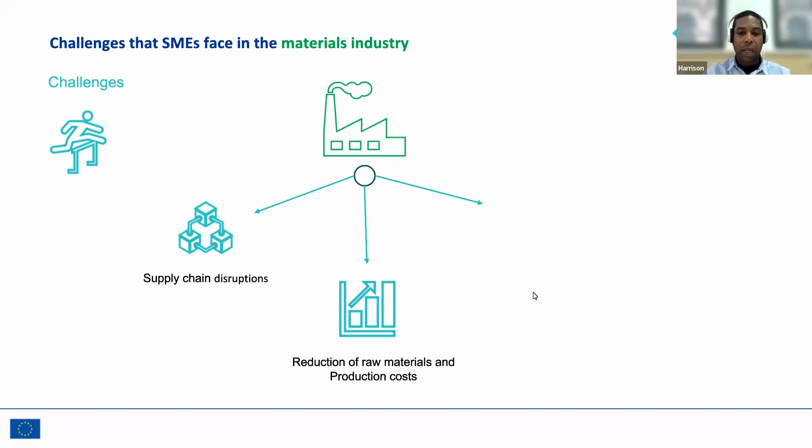Now, the second aspect: raw material and production cost. It is true that many companies, day by day, have production, have product. However, sometimes they are not doing it under optimal conditions; they are just having product, just producing. The process and the parameters could be set according to material requirements, but as soon as the material changes in some specification—the raw material, once it arrives at our company—maybe we need to change the process, and some correlation between the process parameters and the product properties is needed, which can be provided by the proper digital technology.

Also, the lack of technology adoption could be a challenge. Why? Because of the resistance of the operators to adopt the technologies, and because of the first issue I mentioned before, which is access to finance to be able to adopt those technologies.

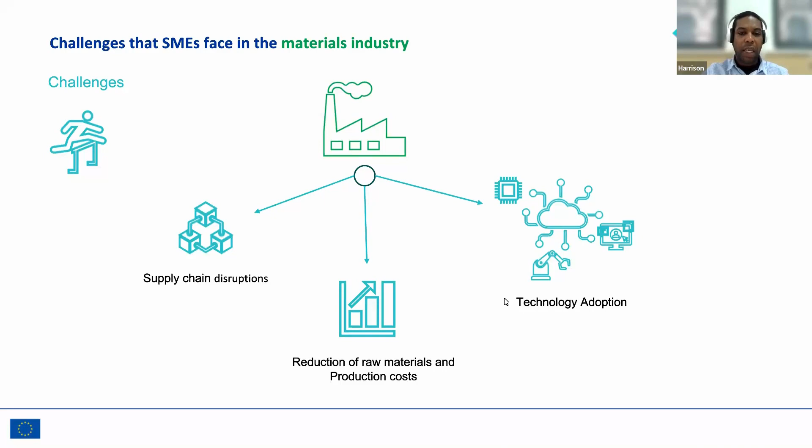We know that production costs are a direct factor in determining our revenue. So the challenges of optimizing the use of raw material and reducing production cost will have a direct impact over the three principal stages that result in a product: design, processing, and manufacturing operations. Why? Because those are the stages in the industry that determine a good product at the end.

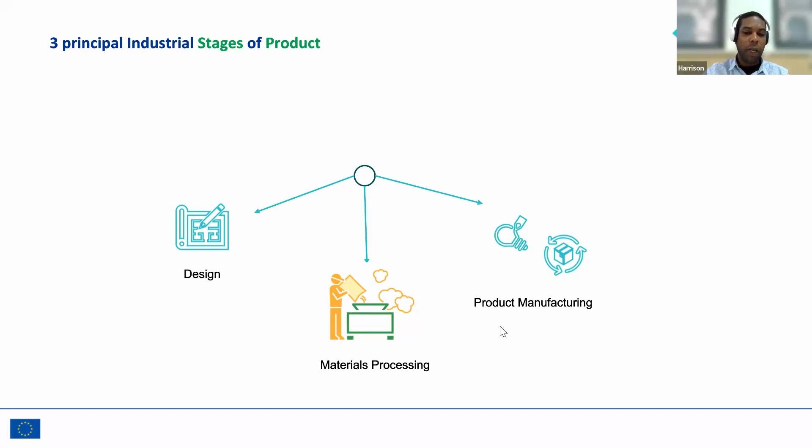Beginning with design, if we don't have the proper tools to adapt our product, if we don't have the specific conditions by which the material can be processed, we will probably be wasting material instead of going directly to the production operation. Those three stages could become a real headache for SMEs that haven't adopted the proper technology, especially when demand increases, because we need more product in even less time.

And it could also be a big nightmare when innovation shows up. Why? Because SMEs must think about new materials to be used, their specific properties and characteristics. They also need to determine a design to apply that fits the product, and the processing conditions in which the new material has to be processed.

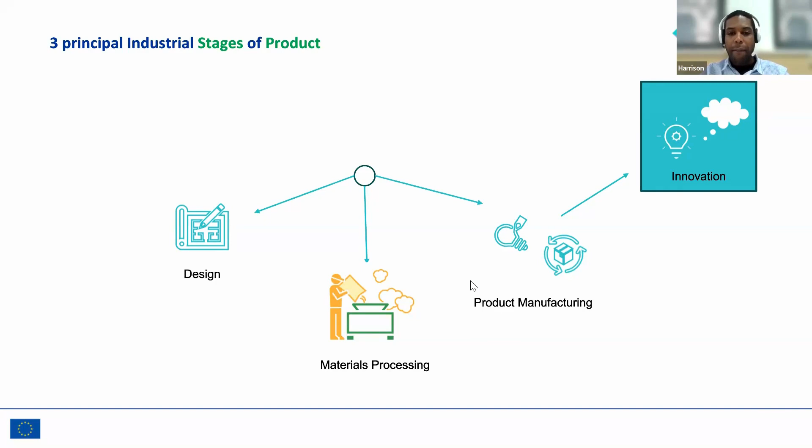Most of the time, those innovations imply changes in the production line, especially until getting the optimums. It won't always be the same to manufacture under a well-known procedure compared to a new one, meaning the innovation, because as I said before, innovation also implies trial and failure, and that means resource consuming.

However, making those trials and failures with the help of software could reduce not just the use of resources, but also give us a result right away, without waiting so much time - this could be so useful. Moreover, it reduces production cost, since the manufacturing operation can be based immediately on the optimal condition we obtain as a result with the help of those digital technologies.

Despite the challenges we have since acquiring this technology, it also allows us to establish correlations between process parameters and product properties. Also, by using new technologies, we can have better traceability of our material and of the process, and we can have access to data, continuing to improve by storing that data for further improvement in the company.

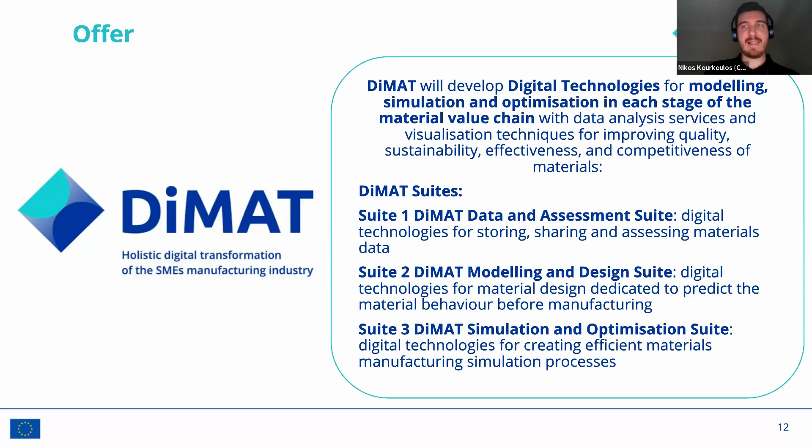For the development of this solution, we are collaborating with specialized partners. We have a very strong commitment from research and development partners such as Fraunhofer, UPV, NTUA, and CERTH. We have technology providers for developing the toolkits, and industrial partners like Imerys and Hegla to test the solution within the project. This is how we actually know that the toolkits released on the market are going to be functional and needed. The specialist partners are responsible for exploitation and standardization activities.

Through our development and deployment of our solutions, we have 3 main goals: technological, economic, and societal. Technologically, our goal is to provide open source solutions to support SMEs in optimizing their material production processes. Economically, we provide cost-efficient and affordable solutions, promoting the transition to industrial digitalization. Societally, our goal is to speed up the transition to a greener economy and support the sustainable goals of the SMEs.

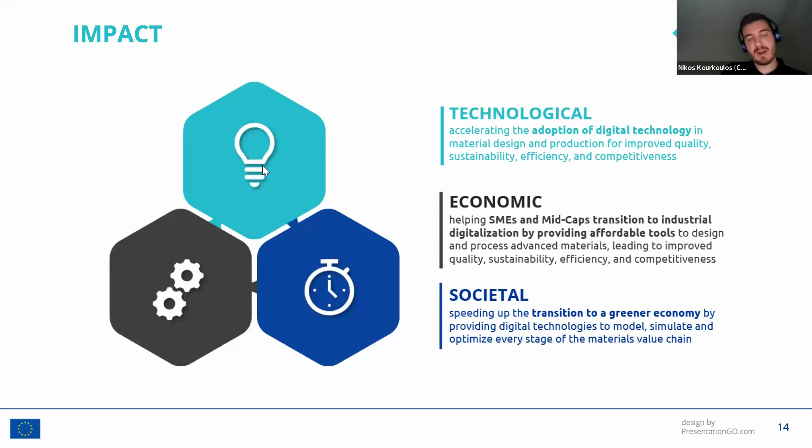So how are we doing this? At first, we started with the overall concept of DiMAT Suites and toolkits, and then we ran the industrial scenarios and collaborated with the pilots to understand where to implement the solution and what is important for them. Based on that, we developed the KPIs and the solutions to work in the best way possible. We developed the framework of the DiMAT Suites and toolkits, and now we're in the phase of developing the suites, and in a few months we will have our first release. Around June, our pilots will start testing the solution, and after this testing we will have a call for early adopters, and we are going to invite external SMEs to collaborate with the suites.

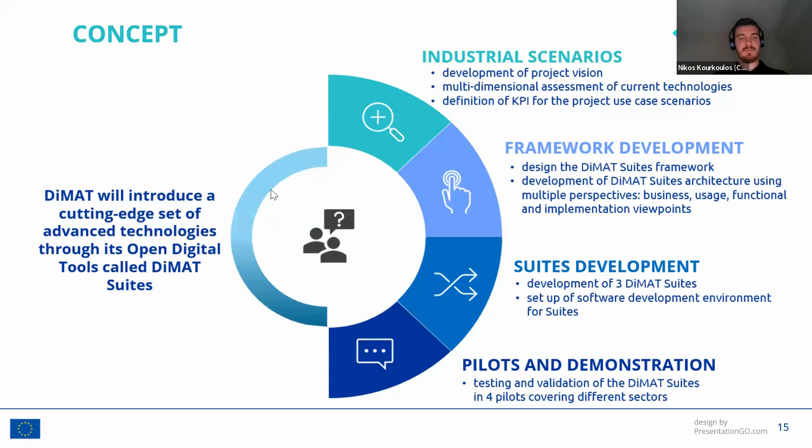As I mentioned, we are developing 3 suites. My colleagues who are developing them will give you more details after. Just to give you an overview, each suite includes 3 toolkits.

The first suite, the Data and Assessment Suite, consists of the Cloud Materials Database Toolkit, which is used for storing data in a harmonized way, the Knowledge Acquisition Framework that classifies materials in a graph, and the Materials Environmental and Cost Life Cycle Assessment Toolkit that gives a graphical estimation of the environmental and economic impact.

The second suite, the Modeling and Design Suite, includes the Material Design Framework Toolkit that provides information for the material design processes, the Materials Modeler that assists in designing materials and predicting their behavior, and the Material Designer Toolkit that assists the design of complex materials.

The third suite, the DiMAT Simulation Optimization Suite, includes the Materials Mechanical Properties Simulator that predicts the mechanical behavior, the Materials Processing Simulator that predicts the outcome of materials processes, and the Digital Twin for Process Control that develops digital twins for enhancing industrial business process control. To be mentioned is that all suites and toolkits are interconnected and can be provided as a holistic solution.

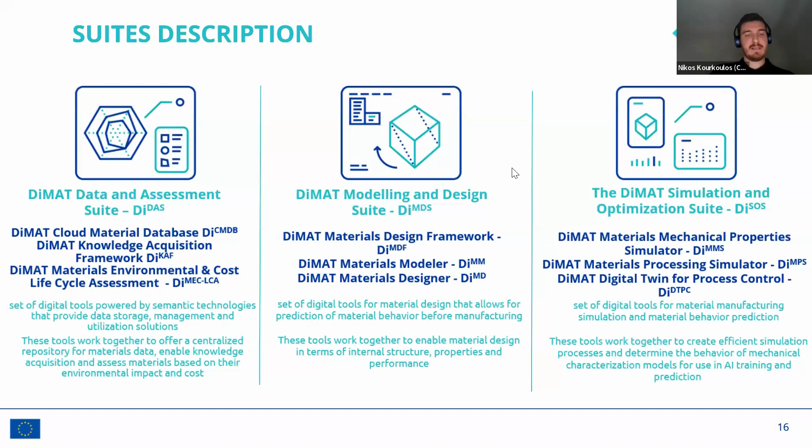Our toolkits are going to be tested in pilots within the consortium. We're having 4 different pilots. The first one is focused on polymer, so textile production. The second one is on advanced composite materials. The third one is on glass. And the fourth is on graphite.

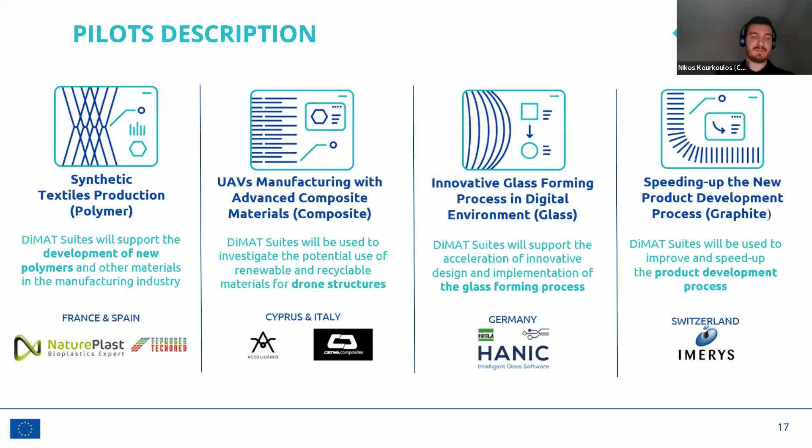Now, before we jump into presenting all the suites and the digital toolkits and how they're going to be functioning, supporting you in all the processes from designing the materials to modeling and processing to manufacturing, we are going to present to you the survey. Since we are a lot of people today, we cannot start a live discussion, but we really want to hear your feedback regarding those solutions because we're having our first release of them within a couple of months. And as I've mentioned, afterwards, towards the end of the year, we're going to have an expression of call for interest from early adopters. So in order for this to happen, we need to hear your feedback. And prior to this, we're going to provide you in a nutshell with information regarding the survey that we're going to launch today during the webinar.

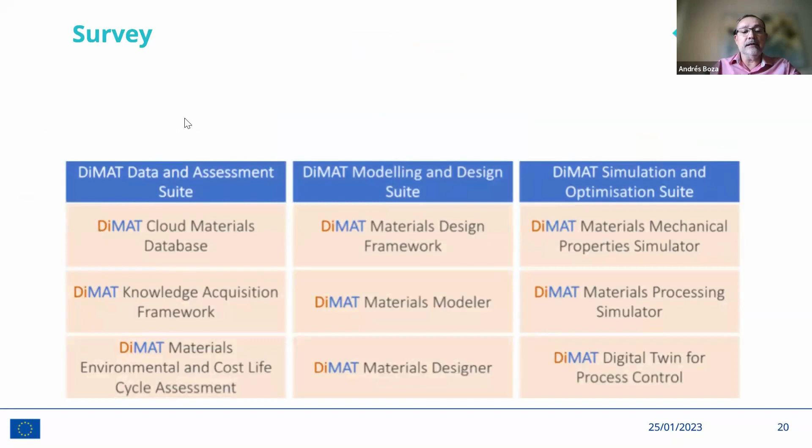And also with the technical perspective. The solution will be presented now, and as you know, we have 3 suites, and we want to know your perspective for each suite. Then we are going to launch three surveys, one after each suite. The idea is to collect information about your interest in each suite and also difficulties in order to make the implementation of the suite in your organization. This information gives us feedback in order to make good governance about the solutions.

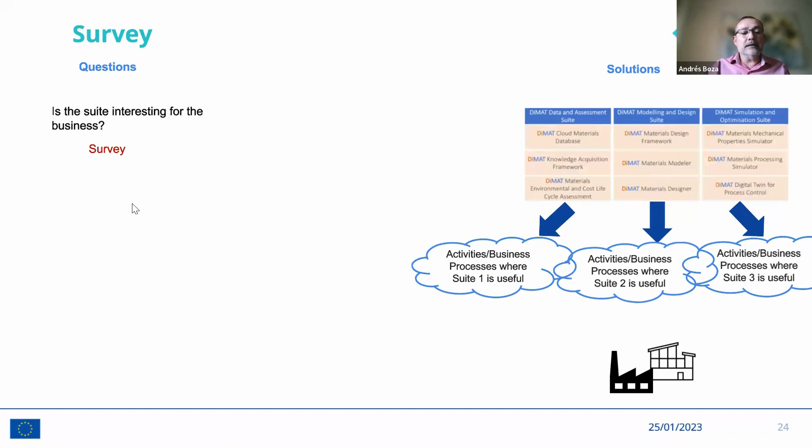The idea is that you identify how you can use the suite in your organization. You identify the business process and activities where the suite is useful. Then each suite is useful for different proposals. And we want to ask if the suite is applicable for your business.

If yes, how important are these different business processes? How much can the process be improved using the suites? A list of processes that will be highly impacted by the suite, and also a multiple choice list

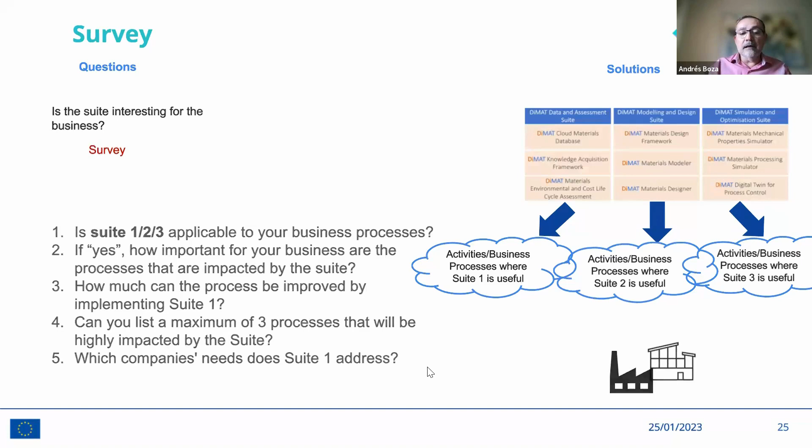about needs that the suite addresses. After that, we can also identify the difficulties to make the implementation in your organization. Then we want to know the organizational difficulties in order to make the implementation in your organization, and also the technical difficulties.

And as I have said before, this gives us good feedback for our solution. The survey is only 9 questions, and the survey is the same for all the suites. At the beginning, you have to introduce information about your company, but only the sector, the size, and the location. And this is all that you have to include in the survey that will be sent after the presentation of each suite. Thank you.

Thank you, Andres. Now, moving to the fun part, we're starting with the actual presentation of the solutions. First, we are going through the DiMAT platform, so how you can actually interact with the solutions. This is going to be presented by Miguel Angel Mateo Casar.

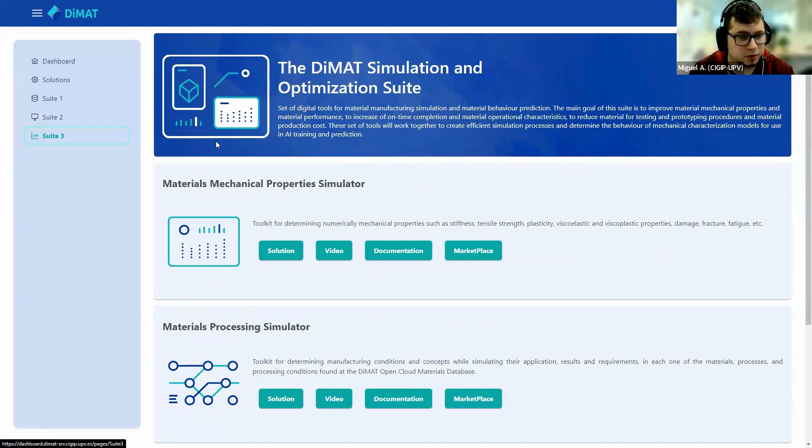This button goes directly to the place where we will sell the solutions or provide it to download the product if you needed it or if you want to include it in your company. As you can see, this platform is working on it now, and the idea is to improve it at the end of the next months with the first and second release of the solutions.

Also, only to remember that all these solutions work standalone, but we provided this platform with the possibility to access the different solutions. And if your company only has 1, 2, 3 solutions, you can only see here your solutions to facilitate the use inside your company.

That is the first view of the DiMAT platform, and thank you all for attending. If there are some questions or suggestions, I'm open to them. Please send me an email, or at the end of this conference, or here inside the chat, and I will try to answer you all. Thank you.

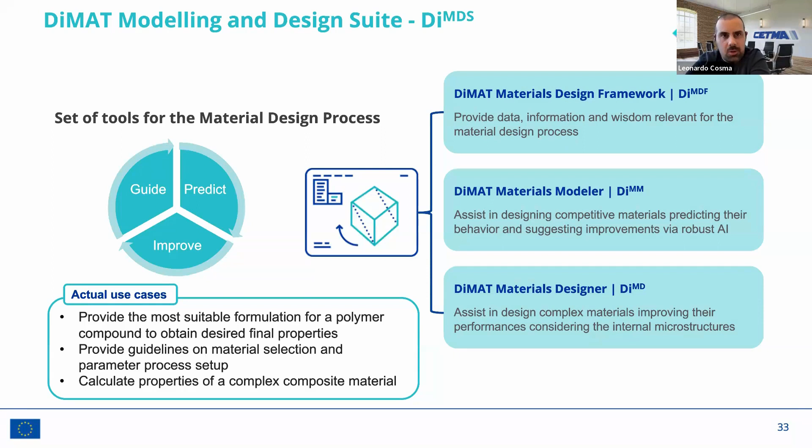That's all for this introduction to the suite. Thank you, Leonardo.

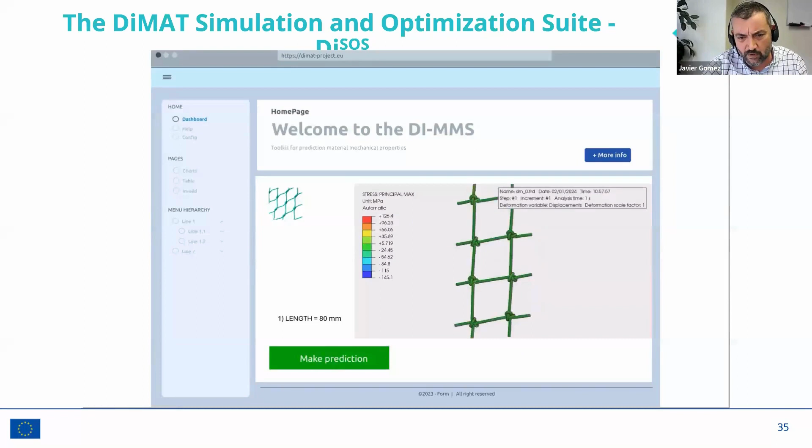The first sample is the optimization of a fishing net, in which with the toolkit we can modify the geometry of the fishing net and predict the strength. We can operate and analyze, like in a finite element program, our results. We can also optimize the dimension of the network considering the strength.

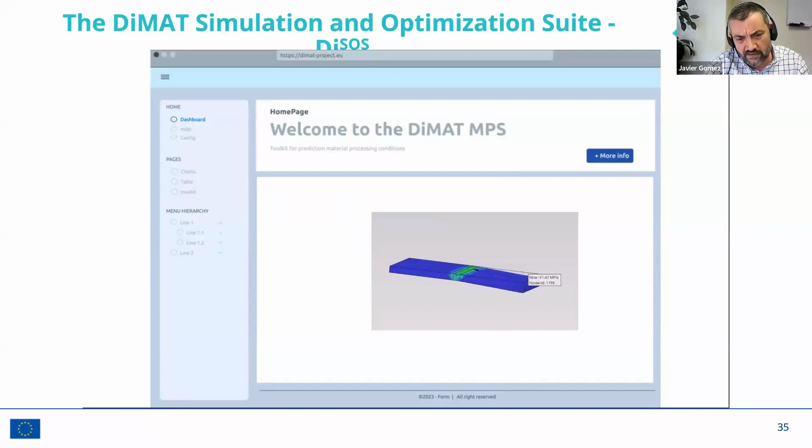In the second example, we are seeing a glass industry process in which we want to optimize our bending operation using a laser. We have some laser parameters like temperature and dimension, and with our toolkit we can predict the result of this operation. We can predict how the glass bends by modifying the laser parameters in real time.

And the third toolkit is digital twin, in which we have an example of how to mimic our factory devices with a virtual model.

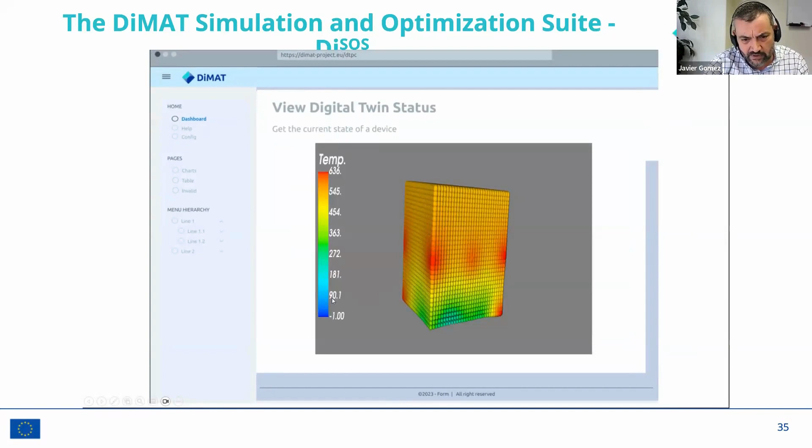For example, here we have a furnace, and we can analyze the temperature of our furnace, and use this for improving our process controlling. All these tools are open tools and work in real time. Our models are not simple, including multi-scale and multi-physics models, but the results are real-time results that we have achieved, including artificial intelligence techniques with our physical data-driven modeling.

We can apply all these three toolkits together. We can apply physical models inside the material process simulator, and our virtual models inside digital twin could be part of the first two toolkits. So we can apply all together with the idea of having a personalized, cost-effective simulation for cost reduction in terms of personnel, energy and time, and overall to understand better the development of new products.

Javi, we lost you. Sorry, it was again an interruption. Now we can hear you. Sorry about the problem.

I am now really at the conclusion with this toolkit. Finally, we can facilitate the development of new products and access to new markets. And this is all. I don't know if you can hear me perfectly.

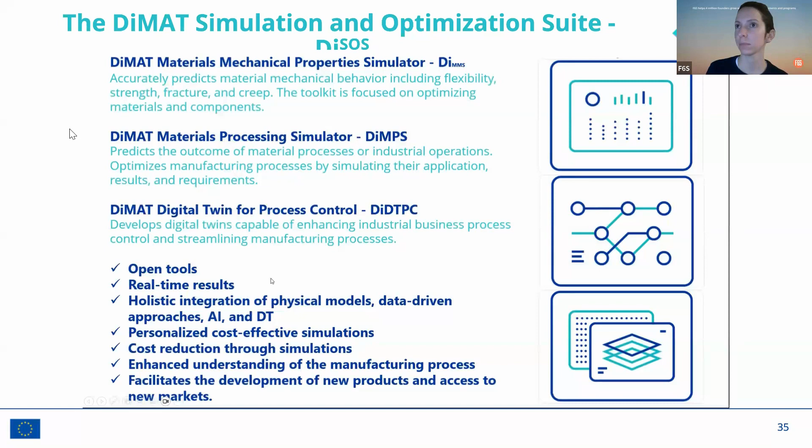In the meantime, if you have any other questions also connected to Suite 1 and Suite 2, please let us know, we still have a couple of minutes in which we can respond to you. And of course, keep in mind that this is only the first webinar and the first introduction to the suites, but we're also going to launch a series of webinars where we're going to target different industries. We're going to discuss the specific challenges, for example, within polymer production or glass production, and there we will have the opportunity to delve deeper into the specific questions that pertain to your core technical activities, as well as business processes.